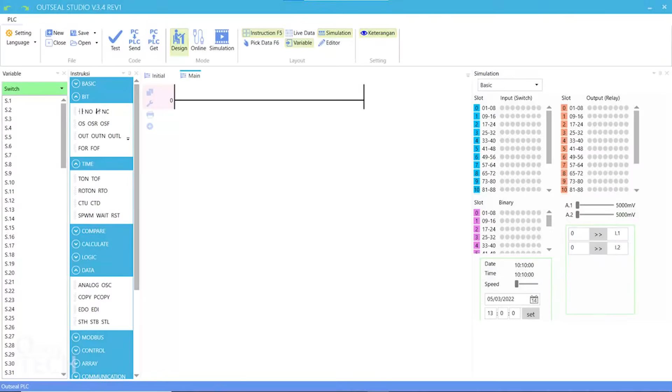Hi, we are moving on to the time instruction group in today's video. The time instruction group consists of timing and counting. The first of these instructions is the timer on delay, TON.

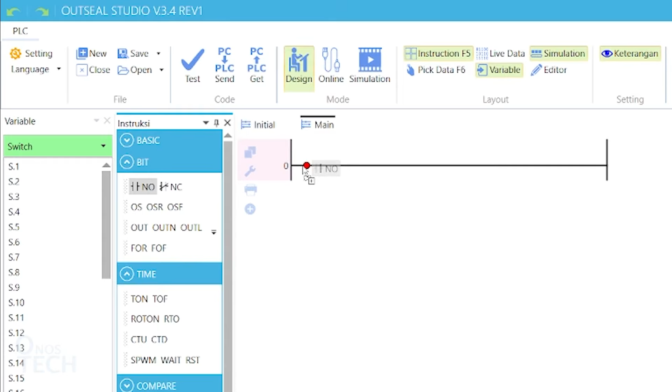To explain the timer on delay operation, first, drag a contact with variable S.1 into an empty rung. Also, drag a timer on delay into the same rung. Right-click on the question mark before the timer label on the timer to select T.1 variable. These are the status and data variables of the timer.

EN status becomes true when the rung condition is true. TT status becomes true as long as EN is true. If the preset value in PRE elapses, then it becomes false. DN status becomes true only when the preset value in PRE elapses. The ACC data value increases in proportion to the time base when the EN is true until it is equal

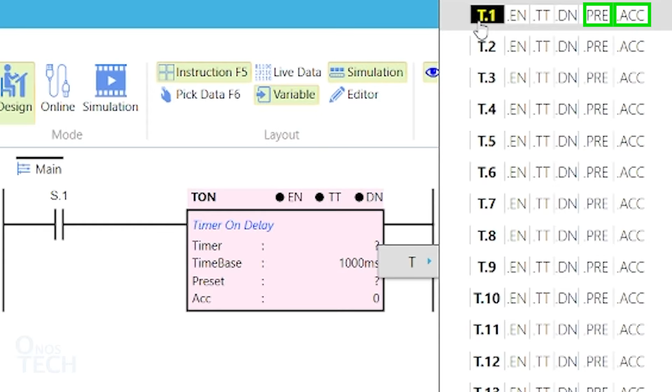to the PRE value. Double-click on the question mark before preset to assign a value of 10 to it. The time base can be set to either 10 milliseconds or 1000 milliseconds. Let us leave it at 1000 milliseconds. Then click on the check to accept the value. When a rung condition is true, the timer on delay will wait for the preset value multiplied by the time base before the timer output status will become true.

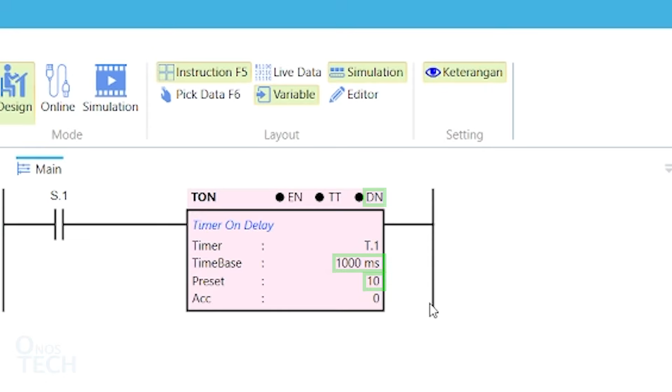Go to simulation mode and set the S.1 contact to true. Notice that EN color first changed to green and then TT. Also, observe that the ACC value increases by 1 second until the preset value of 10 is reached. Then TT color changes to black, while DN changes to green, indicating the completion of the timing. When S.1 returns to false, EN and DN become false, and ACC value is reset to 0.

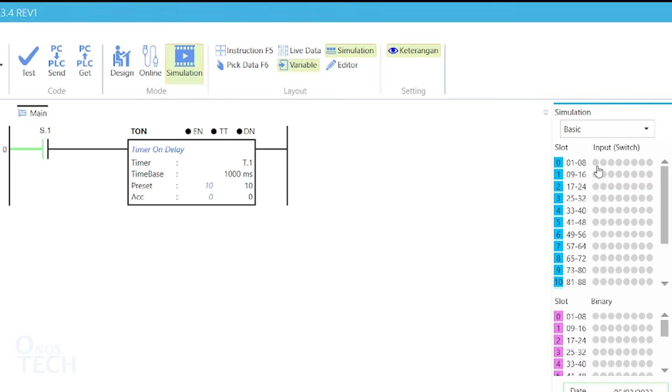Hold down the right mouse button on S.1 button until the timer ACC value is about 5 and release it. Observe that when the rung condition becomes false, before ACC value gets to 10, DN status will remain false and ACC will reset to 0.

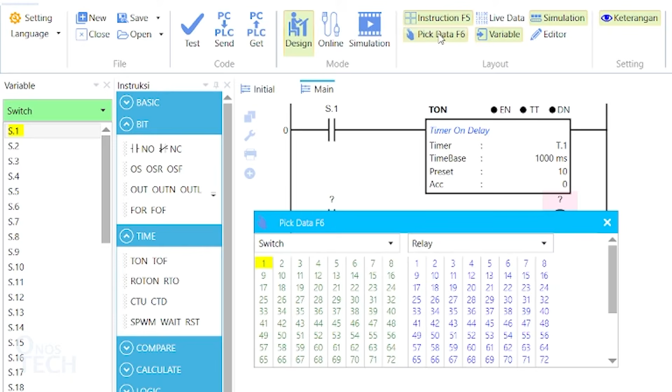Let us now use the status of DN to enable an output. First, add a new rung and drag a contact and a coil into it. Display the Pick Data window and select timer from the drop-down menu. Drag T.1.DN to the contact and 1 from the relay drop-down menu to the coil.

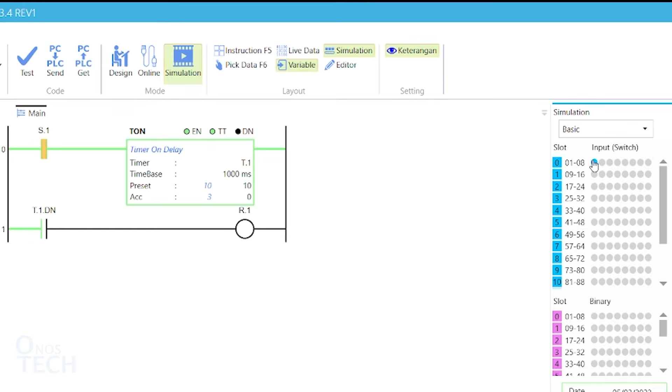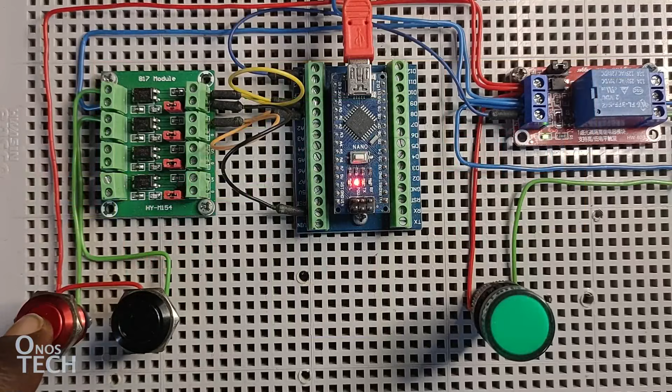Simulate the program and observe that when S.1 contact is true, the ACC value increases. When it matches with the preset value, DN status becomes green, which then changes R.1 status to green through the contact. Using the circuit setup of previous video, upload the program to the PLC. Observe that when the push button switch is held down, the indicator is delayed for 10 seconds before it comes on and goes off when the button is released.

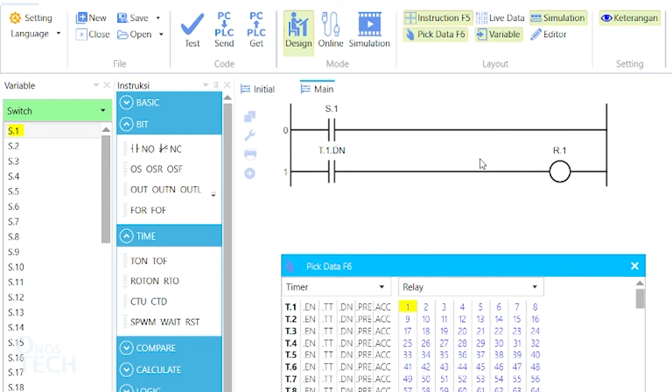The timer off delay instruction output status will wait for the preset time to become false when the rung condition changes from true to false. Now, delete the timer on delay and drag a timer off delay into the same position. Notice that the data and status variables on the timer are the same as that of the timer on delay, except for TOF. Assign variable T.1 to it and a preset value of 10.

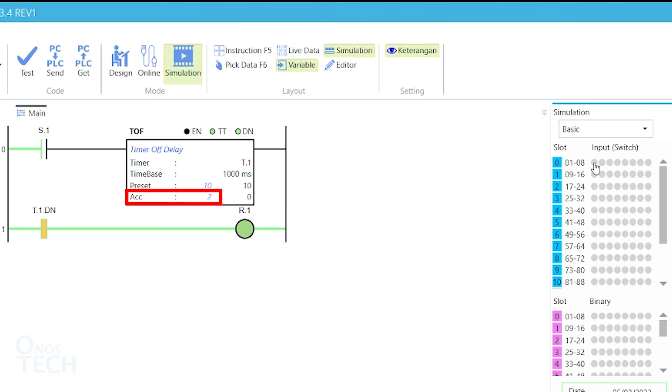In simulation mode, change S.1 status to true by clicking on it in the simulation window. Observe that DN color changes to green, which makes R.1 true. Now, change S.1 status to false. Observe that TT color is now green, while the ACC value starts decreasing from 10. When ACC is 0, DN status changes to false, which also makes R.1 become false.

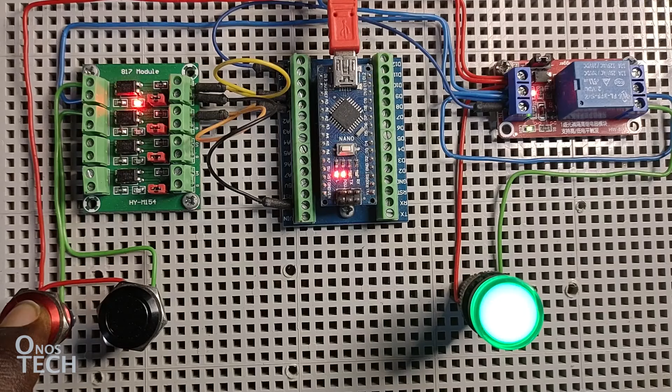Upload the code into the PLC and hold down the push button switch. Observe that the indicator lamp comes on. When the push button switch is released, the indicator delays for 10 seconds before it goes off.

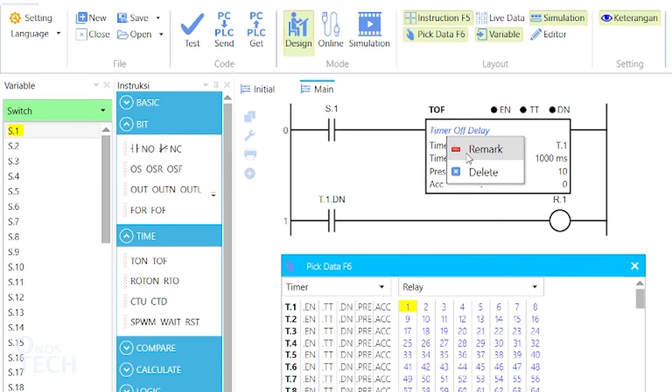The retentive timer on works just like the timer on delay. The difference is that while the value of ACC resets to 0 when the rung condition goes to false from true for the timer on delay, the retentive timer on ACC will retain its value. When the rung condition becomes true again, ACC value increases from the last value until it matches the preset value. Delete the timer off delay and drag a retentive timer on into the same position with the same parameters.

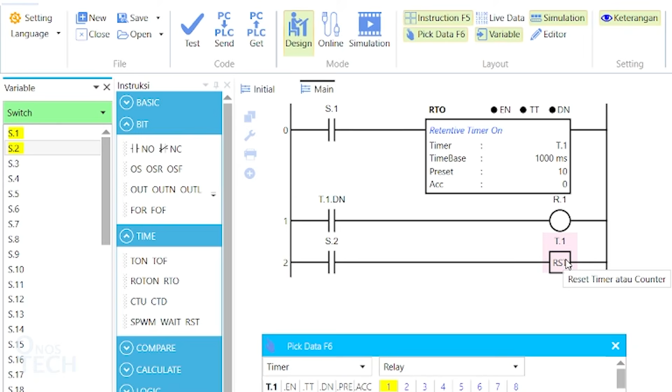Insert a third rung and insert a contact with variable S.2. Then drag into the rung the reset instruction from the time instruction group and T.1 variable from the pick data window. In simulation mode, click on the S.1 contact button in the simulation window. Observe that the timer ACC value increases. Click on the button again and observe that ACC stops increasing.

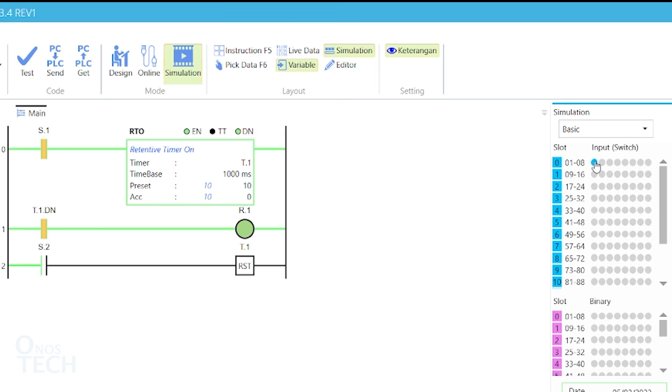A third click on the button causes ACC to increase until it is the same as the preset value. Even when ACC value matches with the preset value and S.1 is false, ACC value will not return to 0 without a reset. Click on the simulation button for contact S.2 to reset the timer to 0.